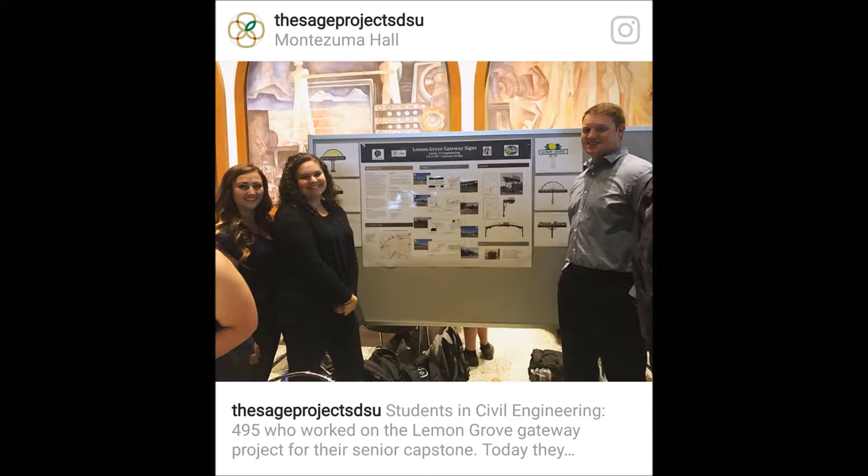Our team members and their responsibilities are Sebastian Dowling, Project Management; Eric Turner and Steve Becerra, Geotechnical Engineering; Alexis Bray and Nicole Deeb, Structural Engineering; Michaela Gonzalez as Construction and Procurement; and Stephen Medina, Transportation Engineering.

For the last 2 semesters, the SAGE project has been working with the City of Lemon Grove to provide student solutions to current problems and future projects. The student solutions are then used by the city as a stepping stone to further city improvements and potential grant options to make these projects come to life. Our project with the City of Lemon Grove is to determine the location, cost, and design of the new gateway signs into the city.

Our project started with a meeting with Lemon Grove, our new client, to discuss their goals and expectations for the end product. During the meeting, we learned about the history of Lemon Grove, what its citizens and leadership value, and what truly defines them as a community. We were also presented with the information required for a request for proposal. With this information, our part of the project began by reviewing the proposed sites and making trips to the locations to determine the existing conditions.

Incorporated in 1977, the city of Lemon Grove is a small suburb of San Diego. A location that used to be filled with lemon groves, it recently has started to see an influx of residents and companies as San Diego grows as a whole. The desire of city leadership is to capture the current growth and direct it so that the city develops as a unified whole. Our Gateway project is a stepping stone for the city to bring about a unified atmosphere.

Initially, there were 9 site locations proposed by the city. After reviewing the existing conditions and general locations, our team agreed upon 8 sites which met the desired criteria for a gateway sign. This consideration was made by evaluating the potential placement, visibility, and the proximity to other entrances in the city. After determining locations, we then considered which sign types would be appropriate for each location.

The most important site to Lemon Grove is the downtown promenade location. This location is primed to become the jewel of Lemon Grove. Ideally, this section of Broadway could be used as an area for holiday street fairs similar to the ones put on by the city of La Mesa. The gateway sign will become the entry to the festivity area. We selected a location that was just east of the intersection of Broadway and Lemon Grove Avenue. This location has a large center median and is visible up and down Broadway.

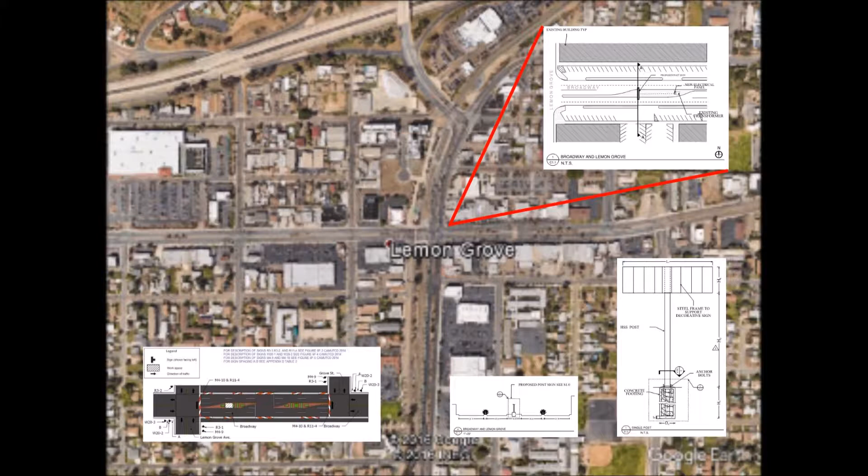After our initial analysis, we consulted KPFF Structural Engineering to help guide us in our structural calculations. Based on recommendations and assumptions given to us by KPFF, we decided on 3 different types of signs to design. In total, 6 single-post center-mounted signs, 1 single-post cantilever sign, and 1 double-post archway sign were chosen for our 9 sites, with us recommending not to place a sign at the Federal Boulevard site due to a lack of space and interference of utilities at all prominent locations.

In designing these 3 structures, we evaluated each member of the structure to make sure it met code requirements and held a minimum factor of safety. For design of the 3 signs, we analyzed the components of the sign and foundation with applicable ASCE 7 load cases to ensure that the sign will withstand everyday and extraordinary circumstances. With the aid of engineers from KPFF Structural Engineering, our project started to come together with the go-ahead knowledge and assumptions provided to us from their experience.

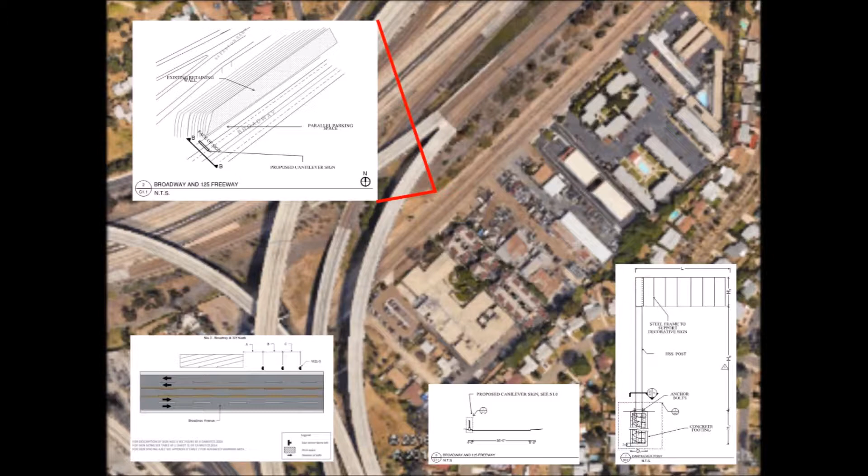Their help was key to starting our project in the right direction. We operated under a few assumptions during our calculations to help aid the design process. Calculations were conducted with the assumption that the sign would be a 9-foot by 16-foot maximum. We also used a nearby boring sample from the Lemon Grove Avenue Highway 94 realignment for the soil profiles of

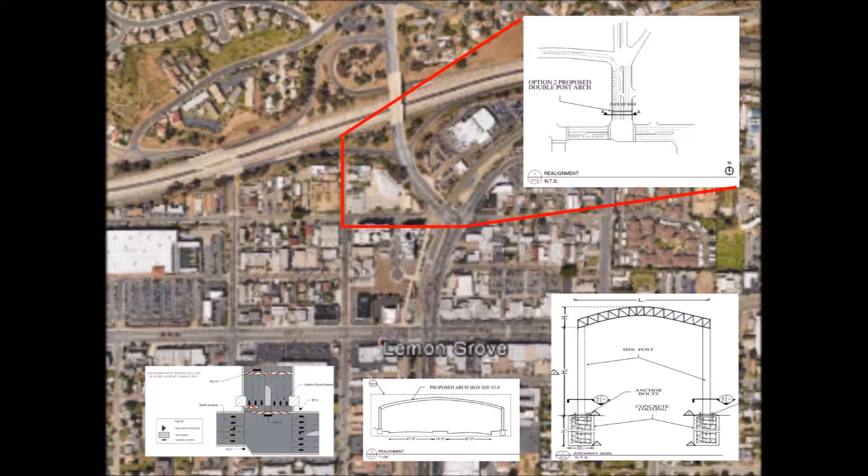all of our sites. We designed the signs with HSS 14-inch, 16-inch, and 4-inch round and square sections, utilizing pre-drilled caisson deep foundations and Simpson mounts and anchor bolts. There were a few differences in the design calculations of the three sign types. For the single post center mounted, we calculated the footing size first to show how much more effective and less expensive a deep foundation would be.

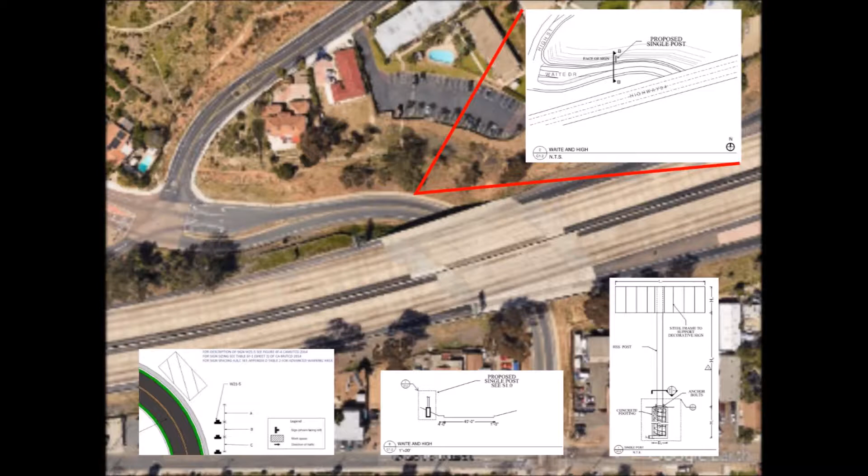And for the double post archway, we calculated the camber of the crossbeam due to the long span in order to offset the deformation at mid-span and help support the sign's load. The goal in designing temporary traffic control zones for this project was to ensure that the proposed plans efficiently manage traffic, citizen, and worker safety. Vehicles, pedestrians, and cyclists were all considered when designing the temporary traffic control zones. Our team expects that the best time of day to construct the signs will be during the night.

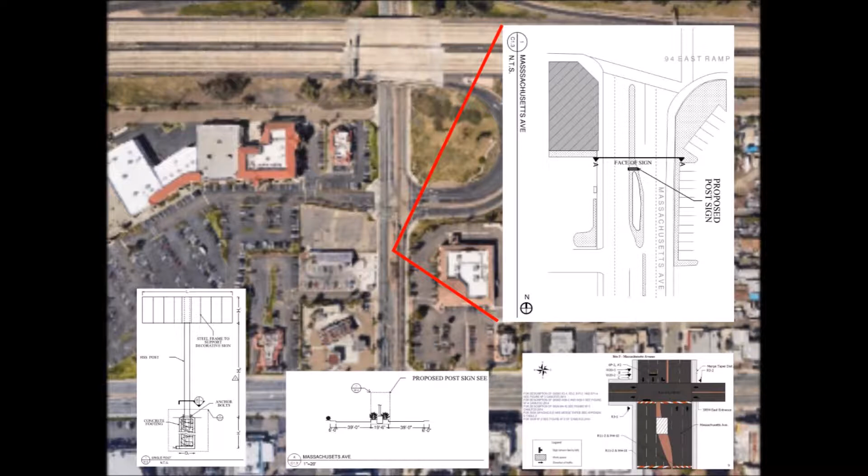For procurement, we determined several standard components for sign construction. The items included the costs for augering, formwork, and concrete pouring and finishing for the caisson footings. Also considered were the costs associated with rebar cages, anchor bolts, and the steel posts, as well as decorative sign budgets and landscaping. For most of these items, we were able to reach out to industry professionals to find estimated hard costs. The exception was the decorative sign budget.

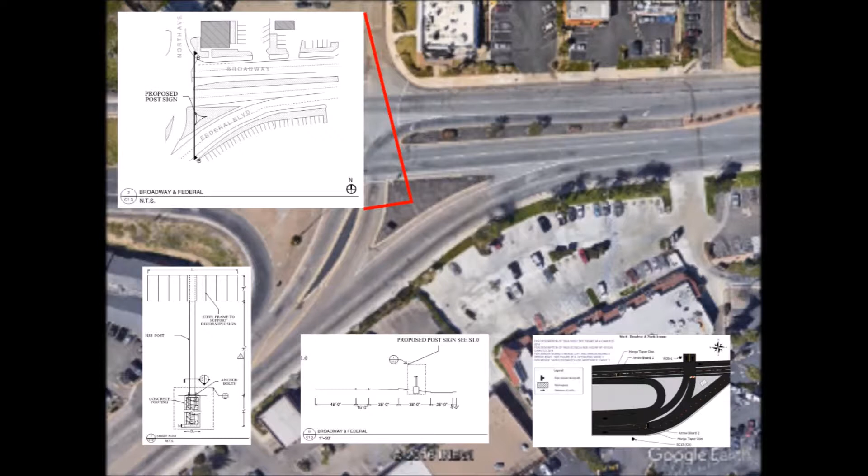For this estimate, the design was too preliminary for a hard cost, so we carried a budget of $8,000 per single post sign and $25,000 for the archway. In addition to the base cost, we included alternate pricing for site lighting, including trenching and electrical equipment. In conclusion, we estimate the total base cost to be $432,750. The project schedule was developed through work experience and a compilation of input from various construction contractors and vendors

in the sign industry. The schedule starts in the design phase, where research and recommendations are made. The next phase is procurement, which includes contract and material orders. It is assumed that the signs will each take about 2 weeks to fabricate, and that no more than 2 signs may be fabricated at a single time due to shop constraints. Our recommended schedule solution is a 102-day work schedule. The schedule has assigned 19 days to the design and engineering phase, 70 days to the procurement phase, and 66 days to the construction phase.

On average, construction will take 10 days per sign per site. The schedule assumes that all of the sites are being designed and built during the same overall project duration. This allows the equipment and crews to benefit from the close proximity of the projects and thus be more efficient, saving money.

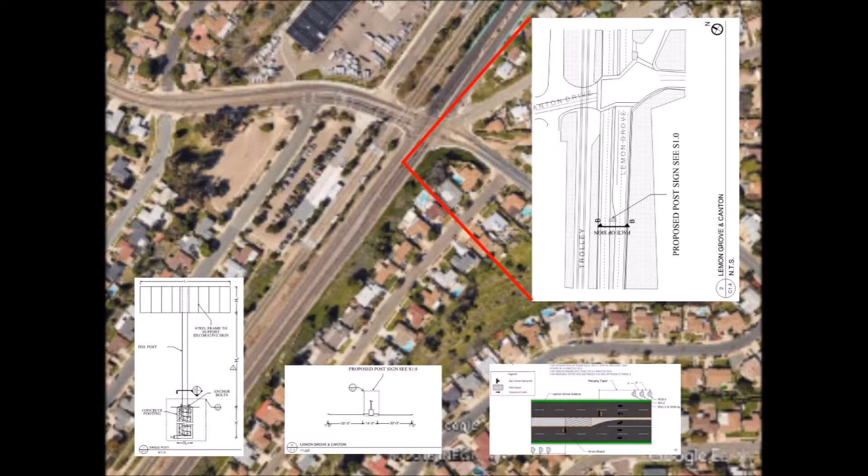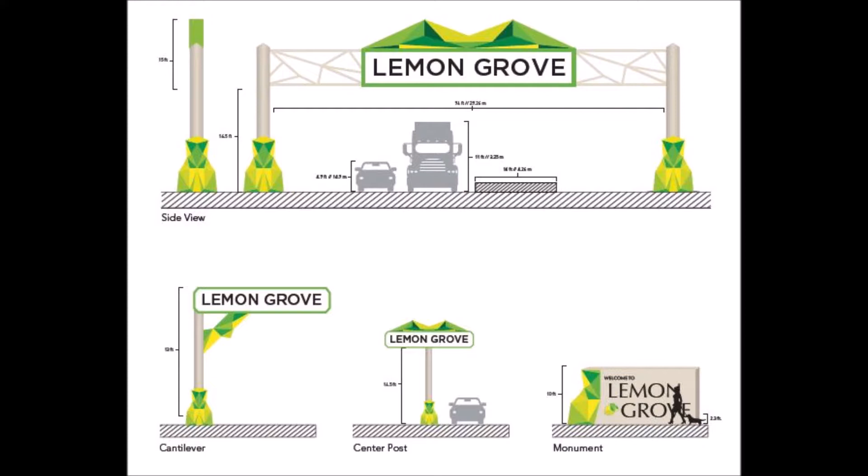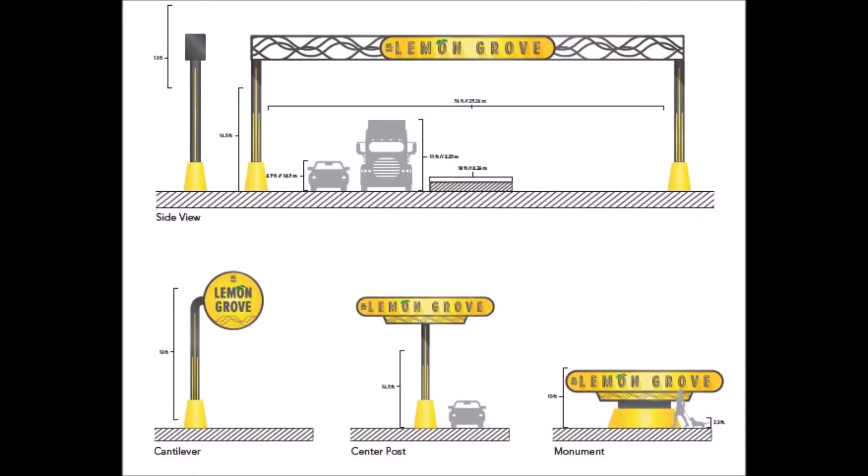As part of the SAGE program, our group was partnered with the design class for the sign designs. The art class started much later than we did, so coordinating with them was done near the end of our project. The design class was tasked with providing a thematic design that could be implemented on 4 different sign types. Each student in the class created a design that would be used for the center post signs, the cantilever, the archway, as well as a monument sign.

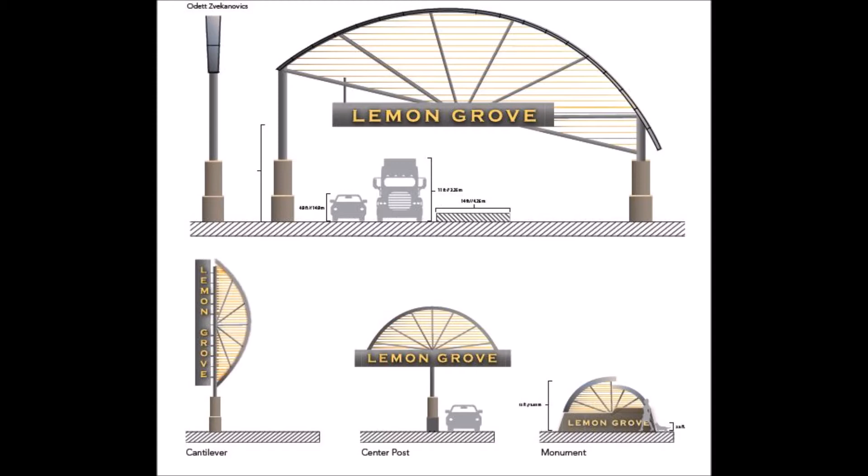We were able to provide some design parameters to the class and gave a constructability review before the final designs were presented to the city at the SAGE Symposium. The students were encouraged to keep the Lemon Grove heritage in mind while establishing modern themes and art styles. You can see here some of the examples of the artwork provided by the group.

This capstone project has been a unique but fun undertaking, and as a group, we learned a lot this semester. We would like to thank the City of Lemon Grove, the SAGE project, and our mentors and advisors for their time, expertise, and counsel. For more information, please check the plans.